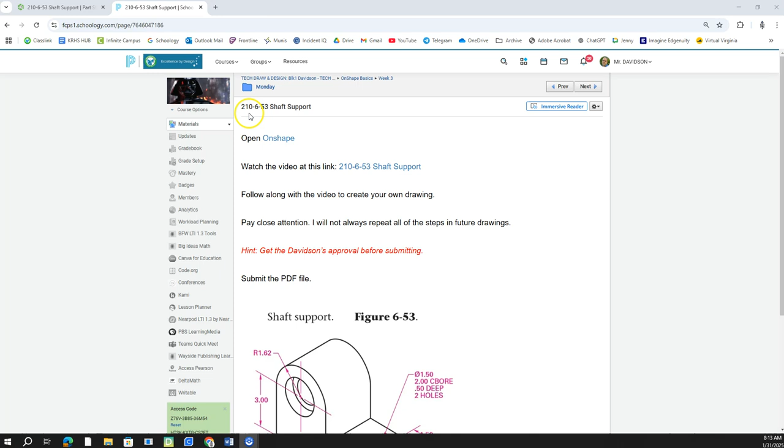Okay, we're going to look at 210-6-53, the shaft support. This one will be a little different. It's got some tangents in here that we're going to use, but if you'll see this part right here, it looks like there's a hole that has a hole inside of it. That is exactly what it is.

There's a 1.5-inch diameter hole that goes all the way through the part in both places. See, it says two holes. It also says that there is a C-bore, which stands for counter bore. A counter bore is basically a hole that has a bottom in it, and usually there's another hole that goes all the way through it after that. So there's a 2-inch diameter hole here that goes 0.5 deep, and then there's another 1.5 through there.

Now this is really easy to do in this program. We're just going to use a point. So I'm going to start. Oh, there's a couple other things. Let me look back here real quick. So the first one is 3 inches off the bottom. The whole thing's 7 long.

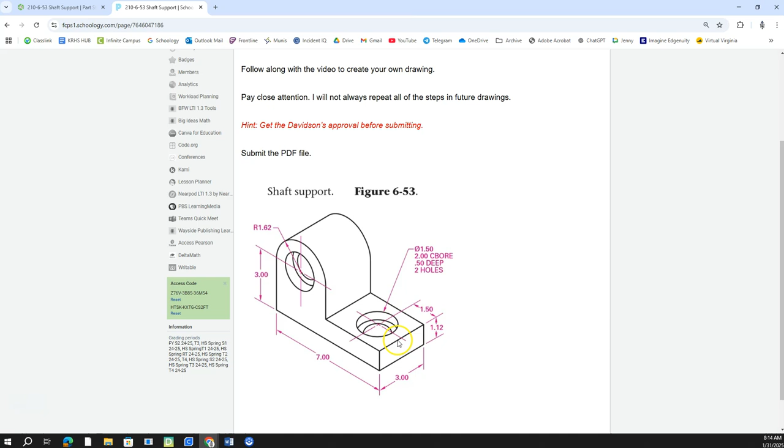This part right here is easy to figure out. Everybody always asks how tall the part is, but that's from that center point, so you just add that radius up. So 1 or 3 plus 1.62 to get all the way to the top of that. And then this one over here is 1.5 in, and it's midway across there, so it's 1.5 across. So those are all the numbers you need to be able to make the part.

So I'm going to start by creating a sketch right here, and I'll right-click normal to, and I'm going to turn off my right side and my top view. At this point, I shouldn't even need that one.

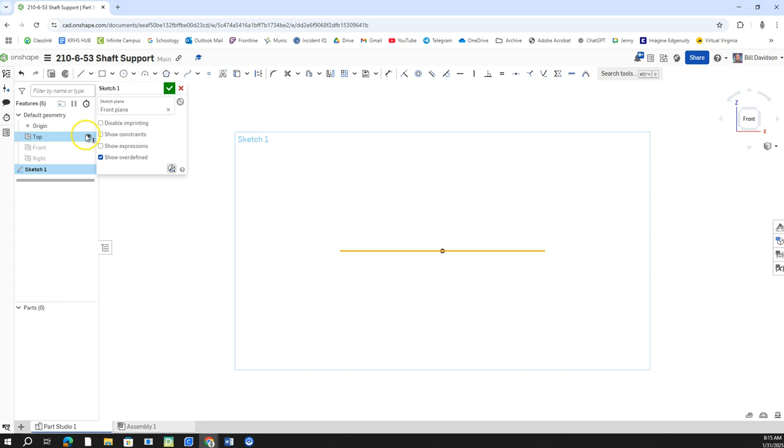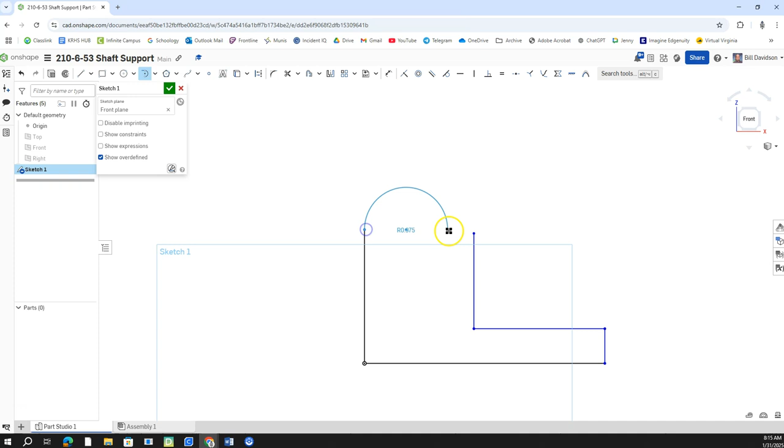I'm going to go ahead and sketch this. I'm going to sketch from here down to here, out to here, up, back over here somewhere, and come up to here like this. Then I'll draw an arc here to here, and that looked a little different. I didn't do a 3-point arc, I did a tangent arc, which is great.

I want to do a tangent over here on this part side too. This one looks like it's already done, should be, so that's the way I drew it. It was accidental. I usually do 3-point arcs and then do the tangent, but that's okay.

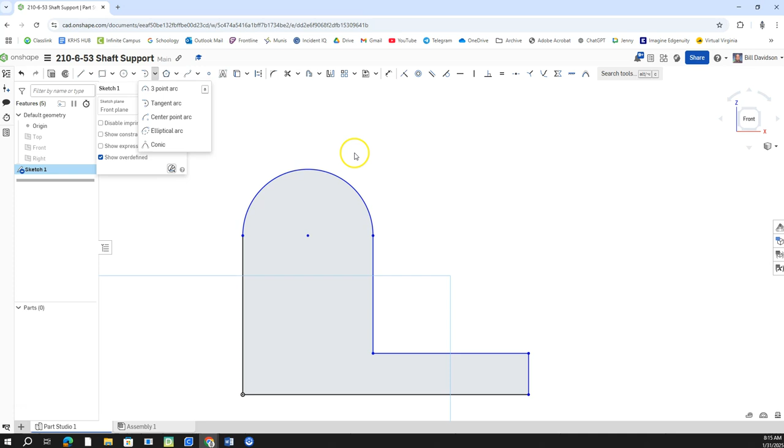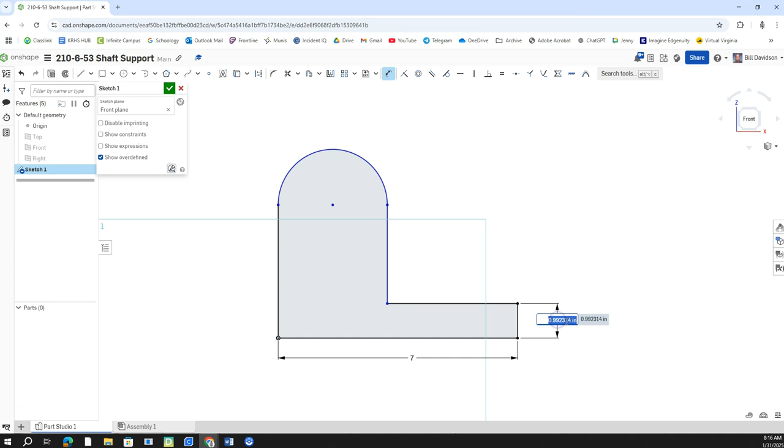We'll go from there, and then we'll start putting dimensions on this thing. So the thing was 7 inches long. 7 was good. Why did it only do that? 7, okay. Let's just go from here. 1.12, 2, and then from here up to the center point, right there was 3, and then the radius across here was 1.62. So that finishes that sketch.

Go to here, and then we'll just extrude it backwards. I'm just going to go off the plane. I'll make it go the other way. Instead, it doesn't need to be symmetrical this time because I want to be on this front plane to do stuff anyway. So we'll make that go back to 3 inches.

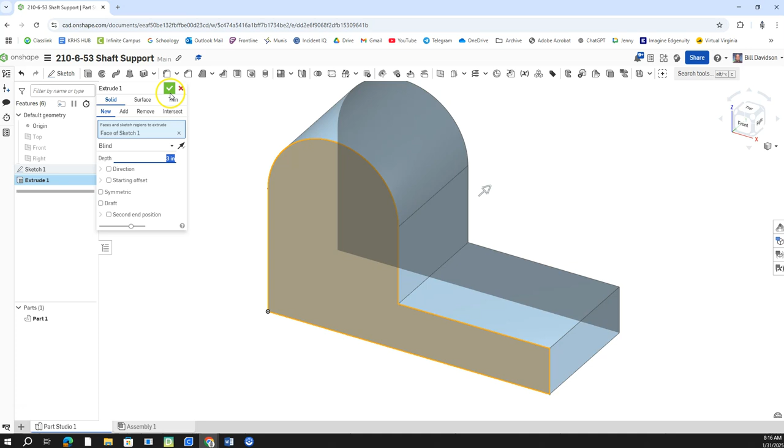So at this point, I'm going to right-click on here, create a new sketch, and add a point right on that one. I'll just make sure that it's symmetrical, so it should put it right in the center. Now this one, I'll finish that sketch.

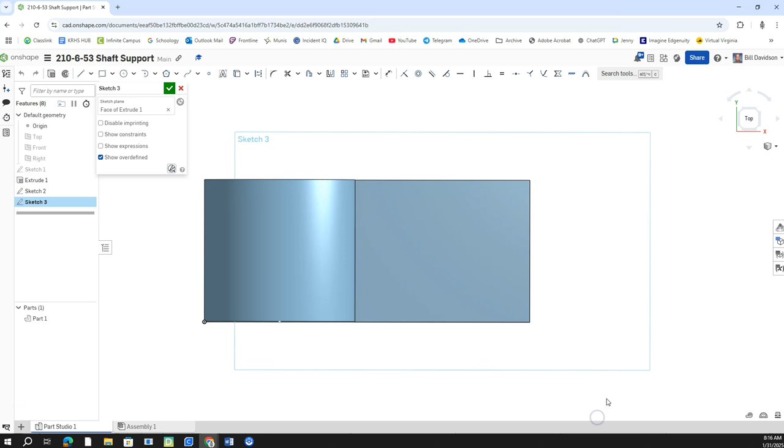This other one, I'm going to right-click here, and you can do view normal to that sketch plane there, and I'm going to move it on there. I'm going to put a point somewhere here in the middle. I'm going to try to get close, but I do know that I had to go up 0.5 or 1.5. And I had to go in 1.5 to find where that center point is.

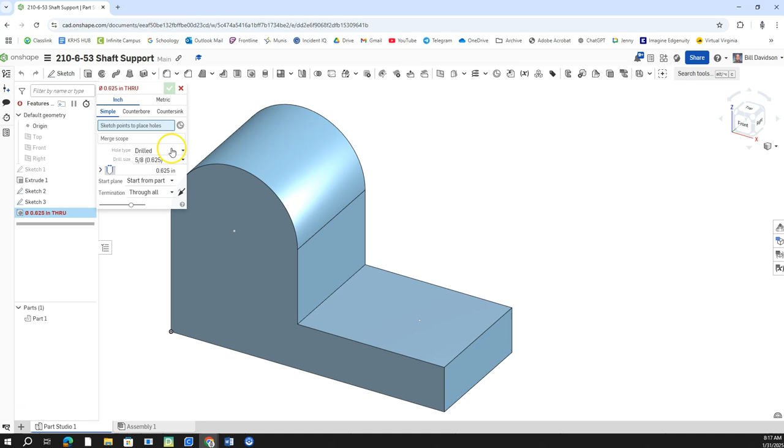All right, click this here. So now when I go to the hole command, I'm going to click on hole. Now I know that this is going to have a counter bore on it, right? So it changes the way things are. You can see in this graphic right here that there's a diameter across there. So that diameter, oh, it's not metric. That diameter is going to be 2 inches.

The depth of it tells you how deep it is. We know that was going to be 0.5. All right, that's 0.5. The hole going through was 1.5. All right, so that's how that goes.

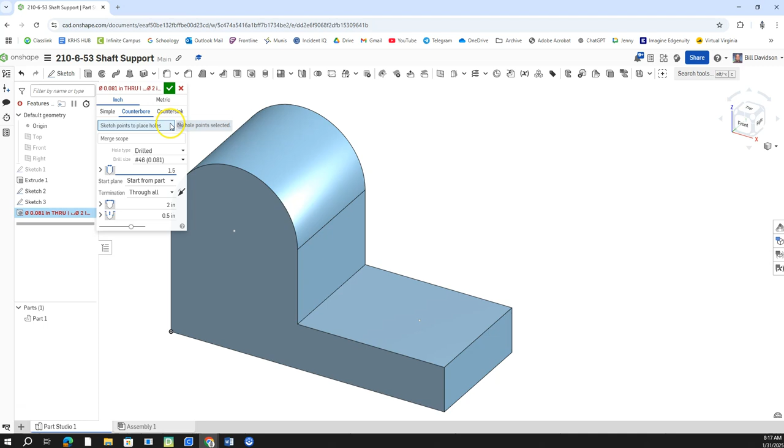I should be able to click this and you'll see that it puts that exact hole in there. And I can do it here too, and it puts both of them in at the same time. So I've got 2 holes like that, and I did them both in the same command.

Which is going to make this better because when I go here, right click now, and I go to make my part, I like using the B there, so we'll do our 4 standard views, and right click here, and I'm going to show those.

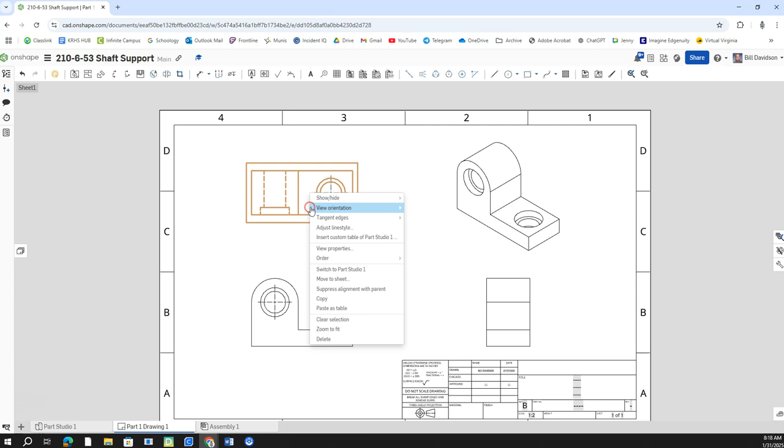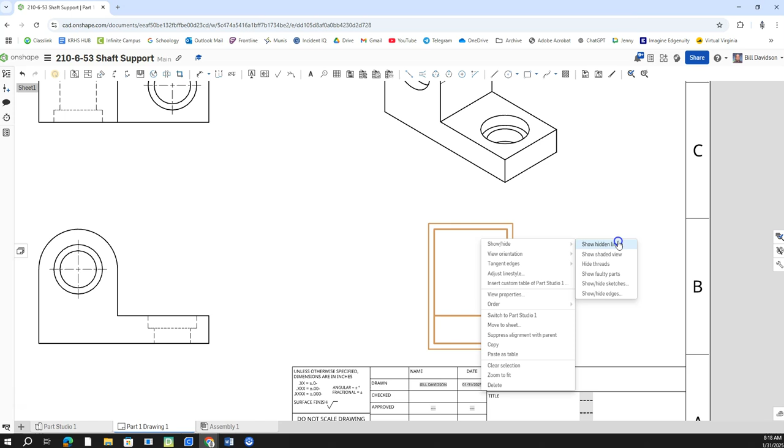I don't think there's going to be any tangents on these 2 views. You could do this, click that, show hidden tangents, or hide the tangents, show your hidden lines. You see the hidden lines right here, what the counterbore looks like from the inside. These hidden lines show you how the counterbore only goes down half an inch. Right click on this one, tangent lines hidden, show hidden lines, and you see the same thing with the counterbores on both of those.

On your right side view, this one looks kind of close. I'm going to grab this and just move it out of the way a little bit.

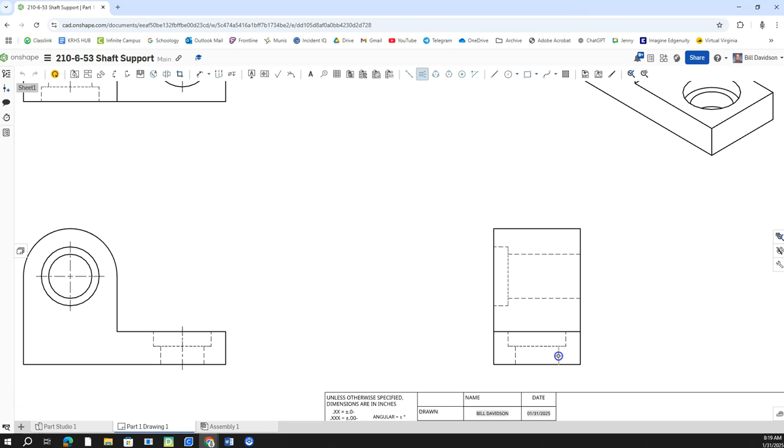Alright, so I almost always start with doing center marks on all of this stuff. There and there, I'll do both of those so it goes all the way through the part. I do this one and I do this one. I like the way that looks, so I'm going to go back up here and do that too. So that adds that center line through there.

That makes it come off the part, and you know that they both have the same exact center point, which is what ideally makes them the part we're looking for anyway, counterbore.

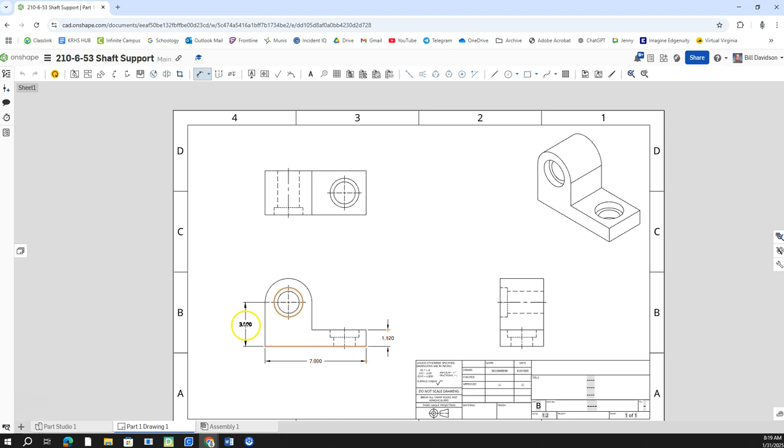And I'm going to do one that's from here to the center point. Put this here. Alright, figure this one out. 2 decimal places there. I am going to go ahead and do a dimension and put this radius on here.

So that covers that. I would like to put one on here that tells us what the width of the part is. So there's the width of the part.

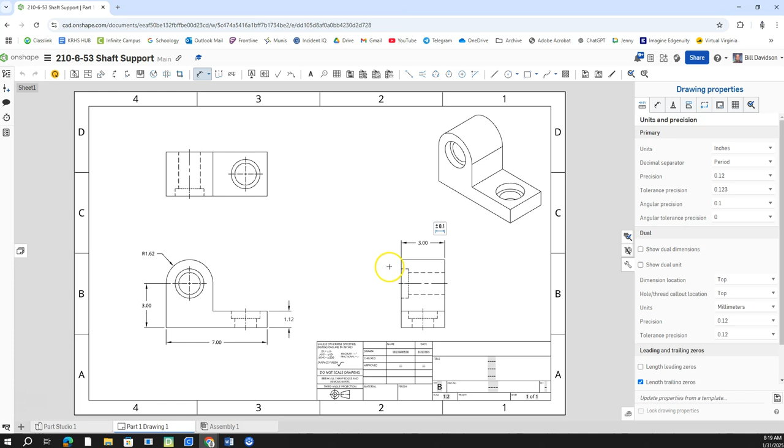Now we got to come up here to this one. This is an interesting one because we need to tell everyone where they're putting it. And even though we didn't have the dimension to do it, you can know that it is centered on there, it's just inherently if the dimension wasn't there.

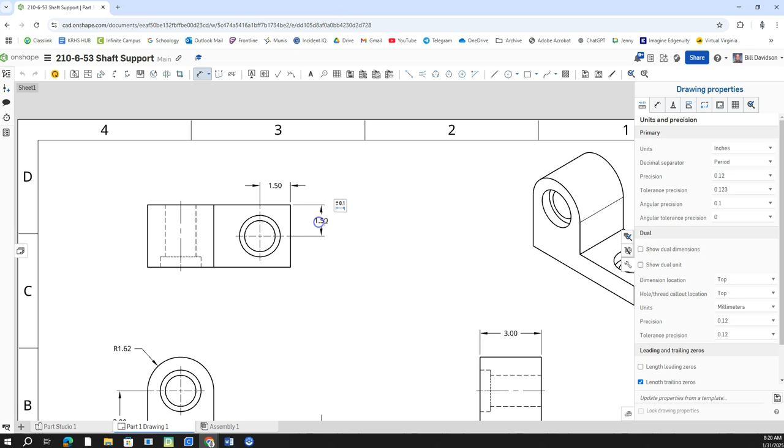But I'm going to put it in here anyway because when I made the center point, I needed to know both those dimensions to do that. This one was on the center point of that one, but this one I had to put 2 dimensions in to do it. So I'm going to go ahead and make sure I get that right.

Now I'm going to use this hole command right here, and I'm going to click this right here. And do you see how this works? It tells us right here that this is a 1.5 inch diameter hole that goes through. The counterbore is 2 inches.

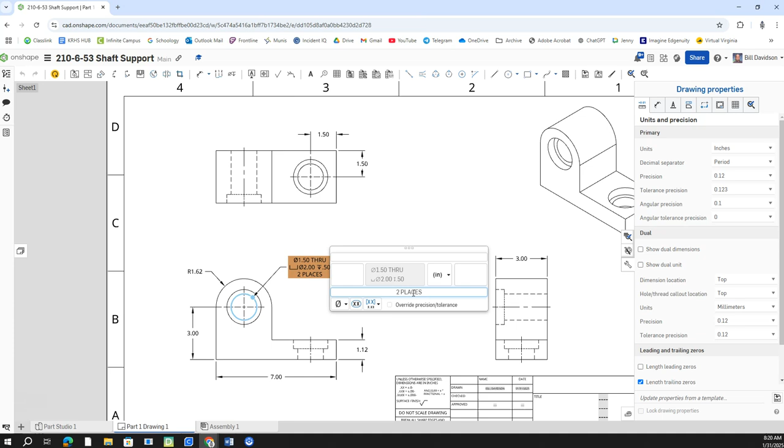It goes 0.5 deep. I'm going to double click here, and below this right here, I'm going to put 2 places. Oops, I want all caps on the drawing. It's all caps. And then, so now we've done that.

So now our part's done. That was easy enough. It took a little bit longer than the other ones we've done, but you know, the class does get harder and harder as we go.

So this was a shaft support, and the part number was... oh, I don't like where that is positioned. I'll fix that. Yours was fine. It's fine, you can even leave it there. It's absolutely fine.

210-6-53. You can leave it there if you want, but it's not a shaft support. It's just shaft support.

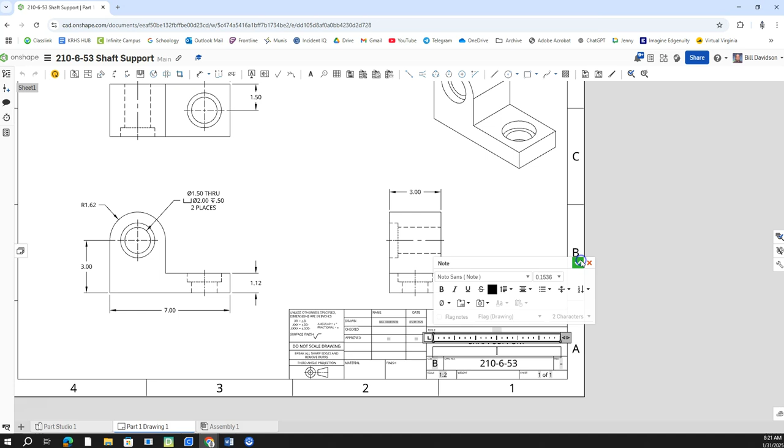All right, that's good. All right. So now we shall double click, zoom to extents, click submit right there, and we'll move on to the next thing.